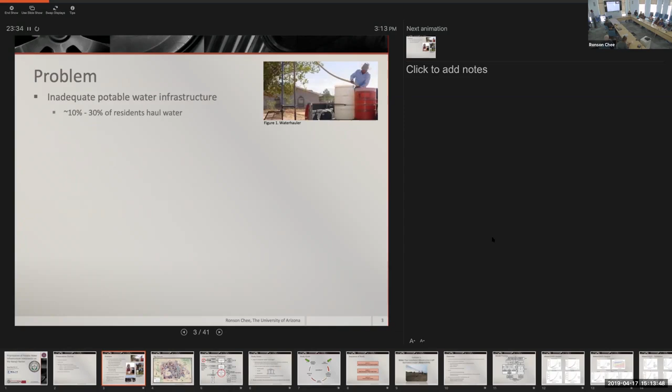Another issue is it causes a lot of health problems, not having access to clean water in your home, sanitation issues. And another issue on Navajo is we have a lot of abandoned uranium mines that contaminate the water. But people actually still use those water sources because there's no other option. Some elders will actually use contaminated water for drinking and for their livestock, and they get a lot of cancer. We have a high cancer rate related to that.

It also hinders the development. We don't really have much economic development. You have small vendors selling different products, sort of like a flea market type setting. And there's really no big business, no industry, no commercial. So the jobs are really lacking. Part of that's tied to we don't have the infrastructure to even support that type of a city setting or sort of large businesses.

So it's kind of like the chicken and the egg. You can either have the infrastructure support the economy, or you can have the economy support the infrastructure. So it's all tied together.

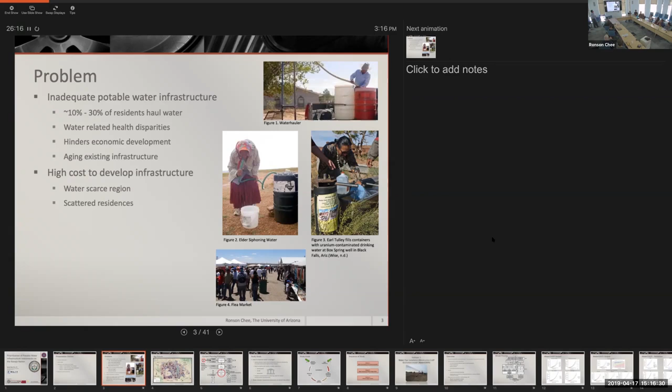And like I said, people are scattered all over. We have towns, but they're very small, not highly populated, and there's just a lack of money to fund the infrastructure.

The utility company is strained. Right now NTUA is the utility provider. About 90% of their customers are all residential, whereas here in Tucson you have maybe 30-40% business, commercial, industrial. When you have those big users connected to your system, they help offset the cost of operation and maintenance. When it's all residential, you can only charge so much per user. So you have this big gap between your operation and maintenance costs and your income, and this gap's only getting worse and worse. So the utility company has a lot of problems.

It's very difficult to design these water systems. There's a lot of uncertainties, and a lot of people are leaving the reservation to pursue other opportunities elsewhere. They'll come to Tucson, Phoenix, Albuquerque, just because there's jobs, there's school, there's opportunity. So we have issues like that.

So it's very hard to plan for how do we plan for the growth. We don't know where the people are gonna go. Then you have things like drought, which makes things even harder to plan for. And then you have this economic issue. There's other barriers besides just water, you know, poverty's big. There's a lot of other socio-economic factors at play.

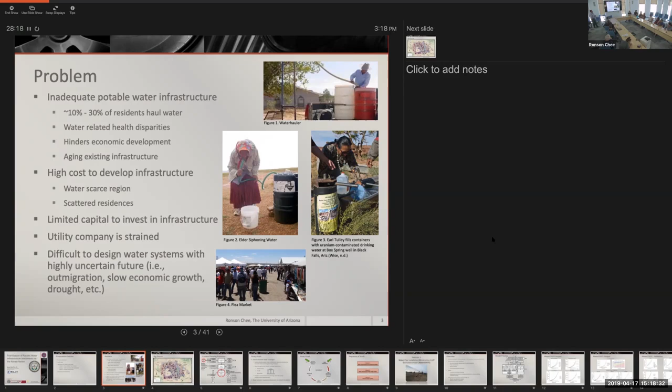So there's a lot of issues. I chose to focus - I'm a civil engineer - I chose to focus on the infrastructure piece, but there's tons of other aspects to look at. There's health issues, there's schools, there's healthcare, there's all types of issues. But my approach was, how do we solve this from the engineering side?

So overall, the big picture is we have here the Navajo Nation. Everything in the gray shaded is the reservation. Hopi's right in the middle. And all the dots you see are homes that don't have running water. And the blue is the existing water lines that the utility company has.

And the red is planned or proposed pipelines to deliver water. You'll see a lot of them come off of the Colorado River to deliver water into Navajo. And the one from Shiprock to Gallup, that one's actually under construction. That's a large project.

It's like a $1 billion pipeline project. The other ones are in the works to be planned, or they don't have funding, but they're actually working on them. So if you add up all these proposed pipelines, you're probably looking at maybe $10 billion of just water pipelines that you're trying to build. Whereas the tribe only operates on about half a billion. So it's going to take years to figure this out.

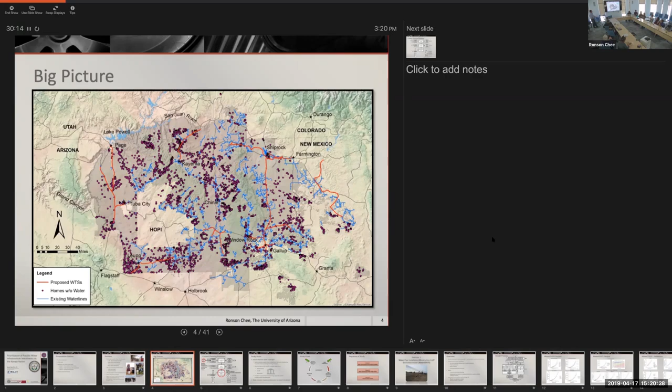So this is sort of how I pieced together how the current planning process is actually funded on Navajo. I put this together talking with all these different agencies - Water Resources, IHS, Bureau of Reclamation. And it's a very linear process. So you have certain people in at the planning and design phase, and then you have different agencies helping with construction.

And then once you get to the operation and maintenance, the utility company takes over. But the issue is that they don't have enough customers to offset the operation and maintenance costs. So there's a lot of people trying to help with the problem, but they're not looking at the back end and how do we pay for this infrastructure once we have it.

So it's like inheriting a big house and you can't pay the taxes, you can't pay the HOA fees, you can't pay the energy costs to run a big house. So that's the issue they're facing - they need some income to help fix some of this problem.

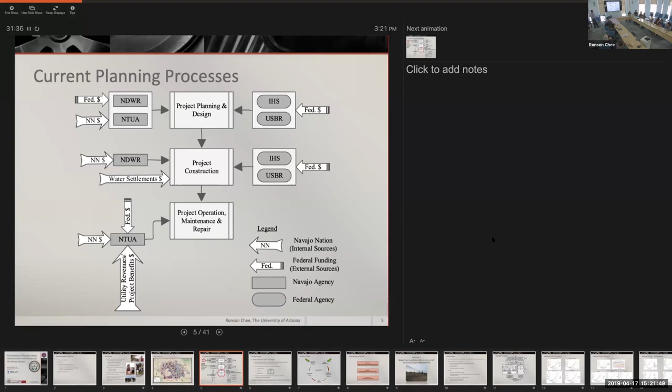And at the end, I'll show a revised planning strategy that we're actually trying to change. Another piece we're missing is the housing - like NHA, they're not involved. The economic development folks aren't involved. And we're missing this long-term planning and sustainability piece from the economics for it to work properly.

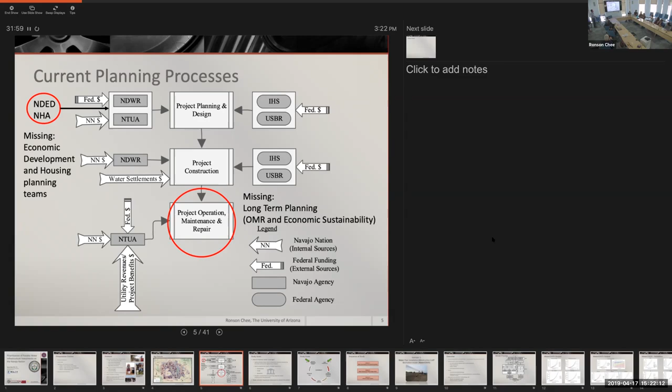So the goals - how do we improve the water coverage? We need to make smarter investments instead of just picking projects, instead of people in the chapter making a lot of noise and asking for a project. In my mind, that's not a good way to choose a project. So let's put some engineering into it.

We need to select projects that can meet multiple objectives. So Indian Health Service, they contribute about 30 million a year into water pipelines, but they only have a health focus. So if somebody wants to plan whatever it is, a business, IHS can't pay for that water capacity to accommodate the business. So they can only design for the home, and then that's it.

So we need to change the thinking and the vision to reflect what the whole needs are of the nation, rather than just taking a template that's been put for Navajo. So we want to try to satisfy environmental objectives, health, and economics. Those are the three, in my mind, the three things needed for sustainable type development.

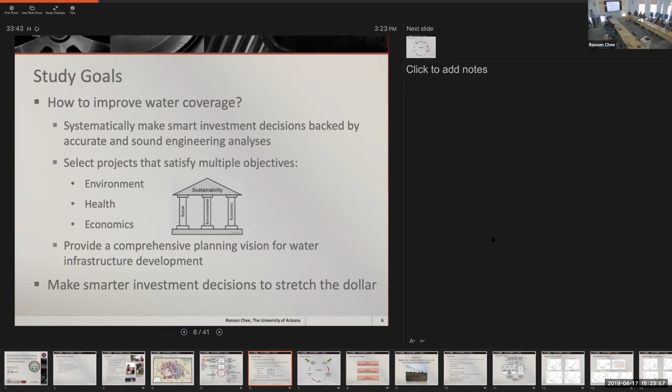And we want to be able to provide a vision for the nation in terms of a plan. Let's have a plan in tackling this problem. Let's not just pick projects here and there and see what happens. So we just got to be smarter in how we invest the money, the limited dollars that we do have. We got to be smarter in where that money goes.

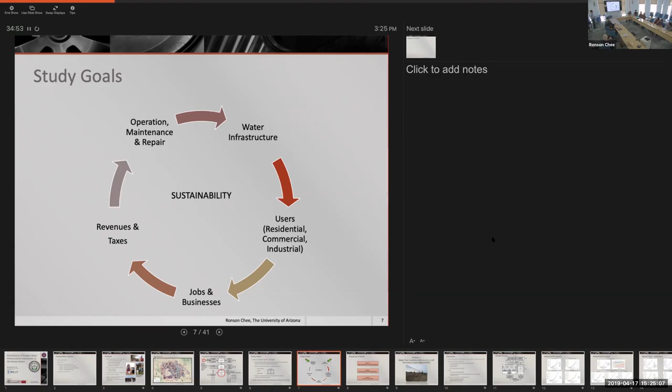So we developed three different sub-studies. One was a cost model for actually installing water pipe. The second one is actual design - a hydraulic model to do the design. And then that design feeds into a decision support system that evaluates different projects. So that's how it works.

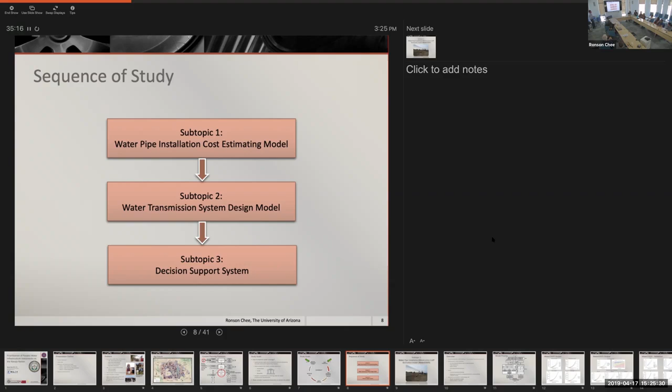So the first topic was this cost estimation model. And this is typically how you install water pipe in a field. I've actually done this before, so that's kind of how I was able to develop some of this model, some of the processes, seeing it actually being constructed.

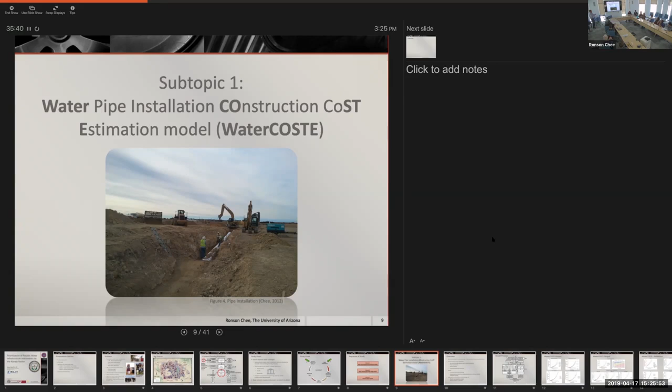Currently the way we estimate water pipelines is we just use cost data from other projects, other places. But when you're looking at some place like Navajo, it's different. Conditions are different. You have longer travel distances, and you have to order pipe from different locations. So when we're trying to apply other project data to Navajo, it doesn't really work. We need a better way to do it.

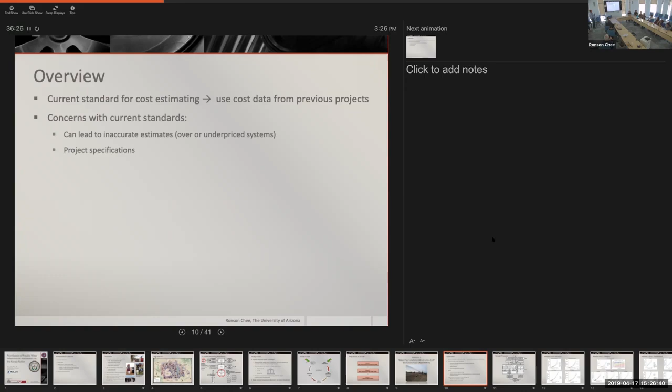If you overestimate or underestimate the pipe costs, you can have impacts in your planning and how much money you're trying to raise for a project. So it's very important, and right now there was really no accurate cost data out there.

So we just said we're going to build our own cost model. When you're evaluating different projects, you need a consistent methodology to evaluate them. If I use cost data for this project and a different cost model for this one, I can't compare them because they're not on the same basis. So the new estimation will allow you to do optimization type analyses and give consistent appraisals in your water projects.

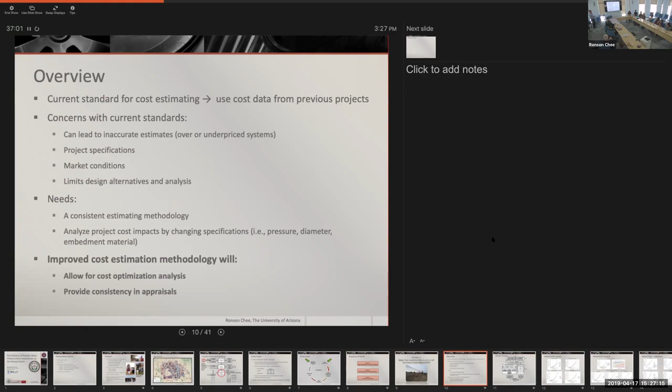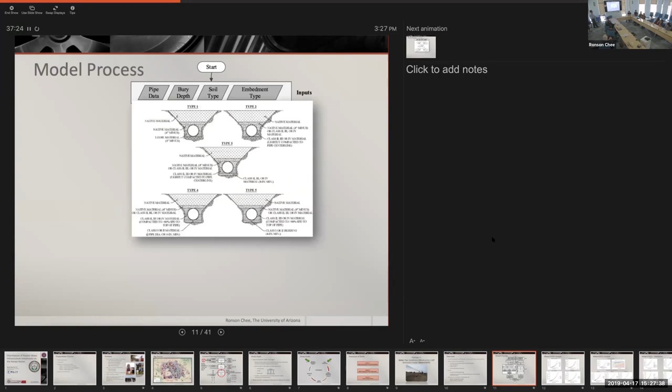So this is the process we basically tried to mimic and develop, similar to the picture. I'll go through this pretty quick, but it takes into account things like how deep you're going to place the pipe, the different slopes on the excavation, and then different embedment types around the pipe.

We're able to evaluate different materials, so we can do steel water pipe, PVC which is plastic, ductile iron pipe, and HDPE which is also plastic. So these are your 4 common water pipe types.

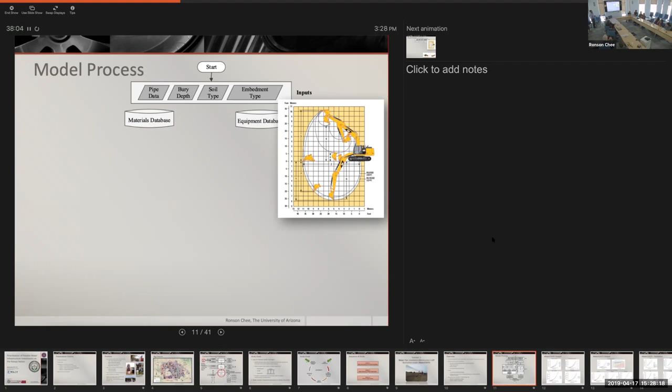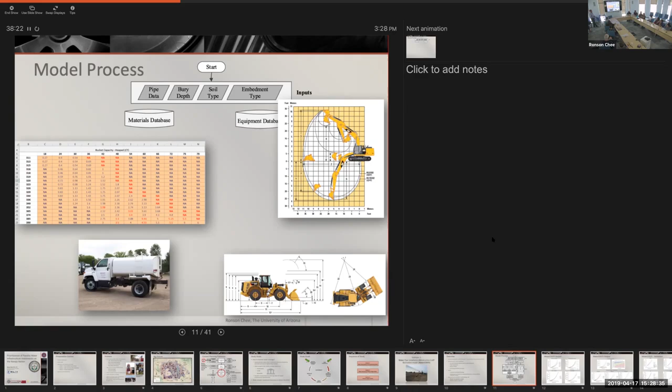We have essentially developed a whole cost table of different pipe types, different pressure ratings, different weights, different materials. On top of that, we also looked at what type of equipment is needed to install this water pipe. So we built in machine performance, how heavy of a pipe they can lift, how many water trucks you'll need. We looked at different cycle times and different capacities of different machines. So that's all built into the model.

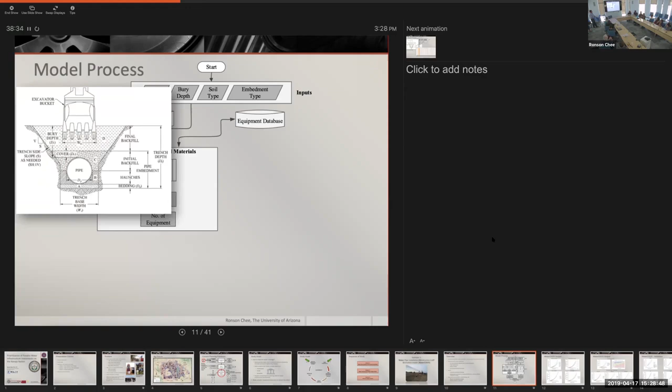And then we estimated labor and materials based on the size of pipe, how long it takes to install. So based on the pipe, we can estimate how many people are needed to do the work, and then how much time it actually takes. When you combine that all together, we can get a unit cost in dollars per foot for a certain diameter and a certain material.

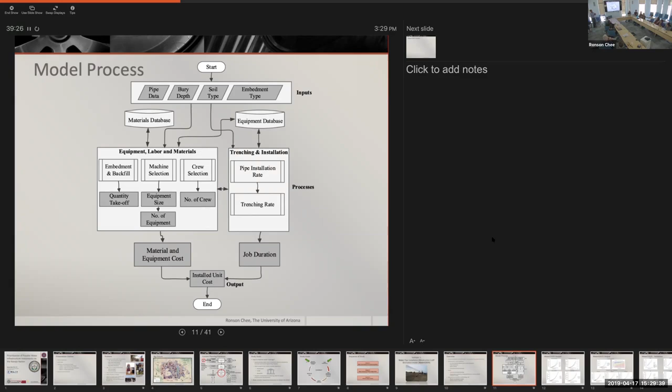So when you have that data, you can do a lot of different engineering analysis, different designs, different options, and you can really fine tune your costs. So you can lower the cost of your system at a very high level, instead of getting down into the detail you typically don't get until you're about to build a project. We built this tool so we could get more accurate data early in the design process and make better decisions.

So essentially the model we built will output results like this. We can change the pressure rating of the pipe, we can change the embedment material, we can change the depth and look at different soil types.

Then it gives us more detailed cost outputs in terms of how much is the labor, how much is materials, and it just gives us more insight into how we can save money for a lot of different projects, looking at different pressure classes and pressure ratings.

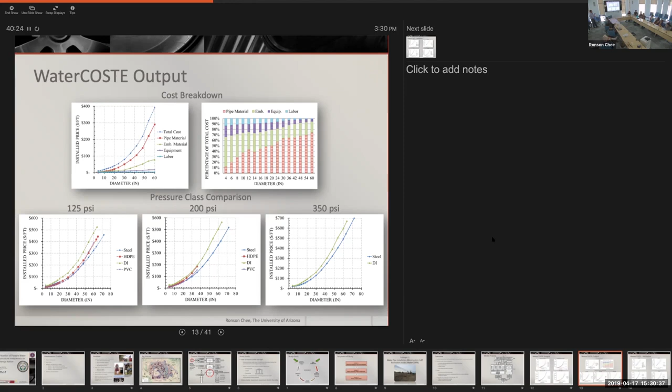So in Navajo, one of the issues is you're pumping a long distance, so you've got to pump over mountains, go down in a canyon, come back up. When you have a system like that, it gets very complex in terms of design. So knowing these costs of different pressure systems gives you a better idea of the design.

So we compared to other cost models, and we actually got really good results. We fell right around where other models were estimating.

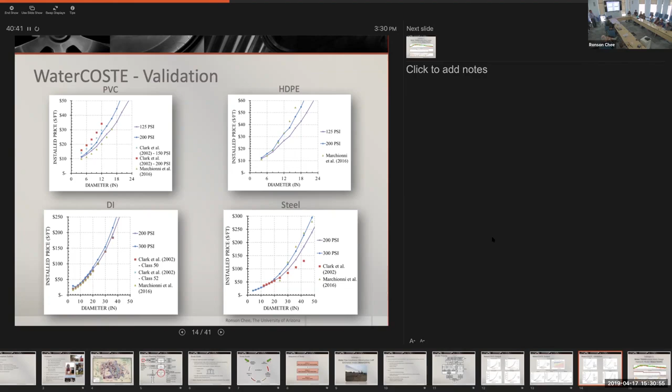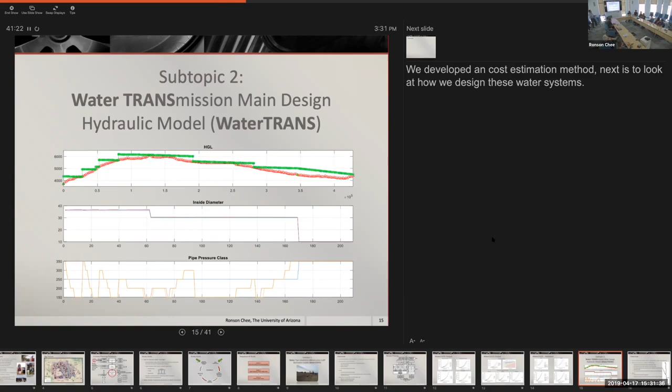So the next tool we developed was an actual hydraulic model to run the system hydraulics. If we design a pipeline, we need to know the pressures, we need to know where to install pump stations, where to install pressure reducing valves. If you're pumping over a mountain, it's very time consuming to do that process with conventional methods. So we developed our own hydraulic model that allows us to do this in maybe a quarter of the time it takes conventional methods to do it.

So the current methods, there are a few models that can do it. However, they have limitations, especially in locating pump stations.

So this is more of a civil engineer's type concept, but the blue dots are the pump stations. If you want to move a pump in the system, you have to do this whole process to actually move a pump. But we found a way to have the model find where to put the pump, eliminating different computation nodes, and we were able to speed up the design process by a lot.

So this is one project we actually implemented this on, from the map before. On the north end is Page, and on the southern end is Cameron, and the little spur off to the right is Tuba City. So we took that system and did some designs with this new model.

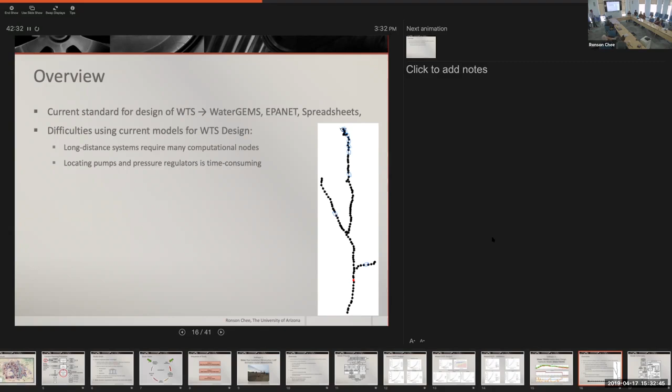With this new tool, we're able to really optimize what the design needed to be so we could save costs on the project.

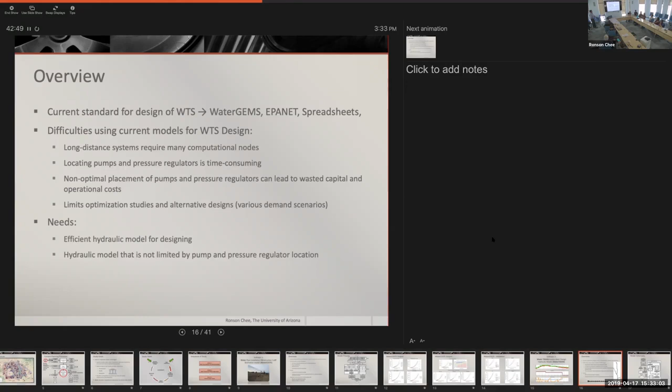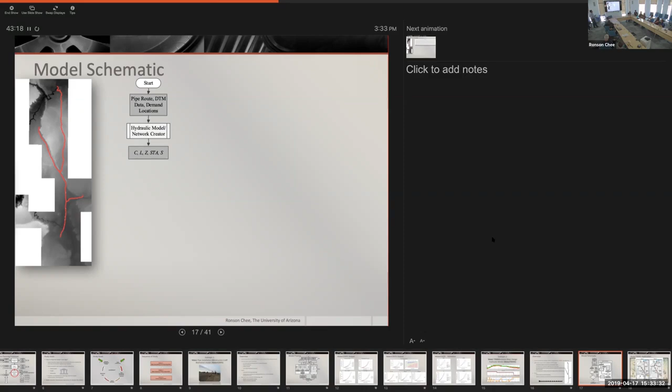So it's very important to consider the energy, how much energy is required to operate the system, and you want to try to minimize how much energy you're using because that all comes back to cost. It costs money to run electricity, run the pumps.

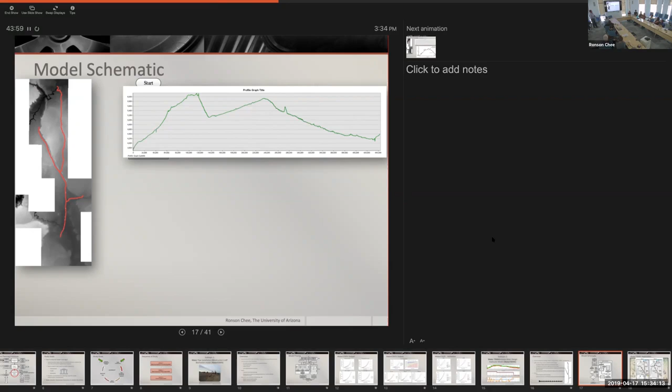These are all the equations and conservation of mass and energy laws that are built into it.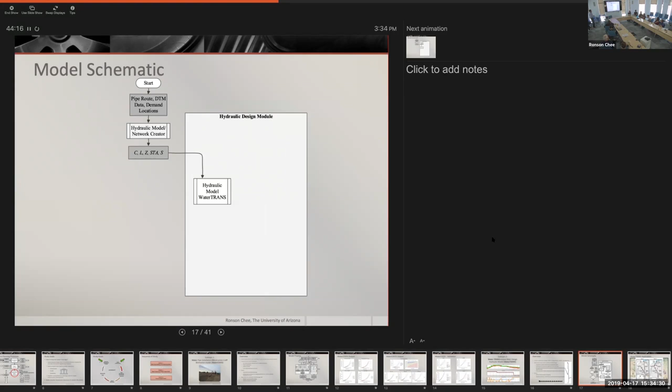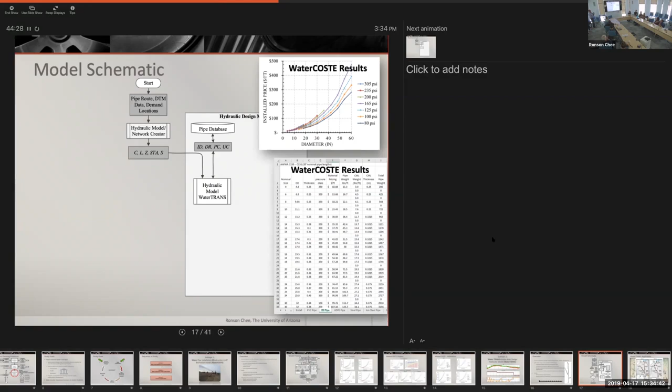We use the results from the previous model, which estimated costs, as input into this model. So now the hydraulic model can choose the most optimal cost material. It chooses it on its own.

We paired the hydraulic model with a genetic algorithm, which helped optimize where to locate these pumps.

Each one of these locations here is a pump station, and all the different lines are the hydraulic grade line. So it runs maybe thousands of simulations to try to find what the least cost design is of the full system.

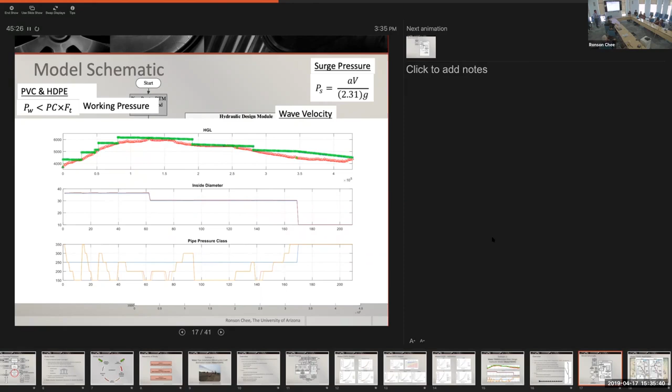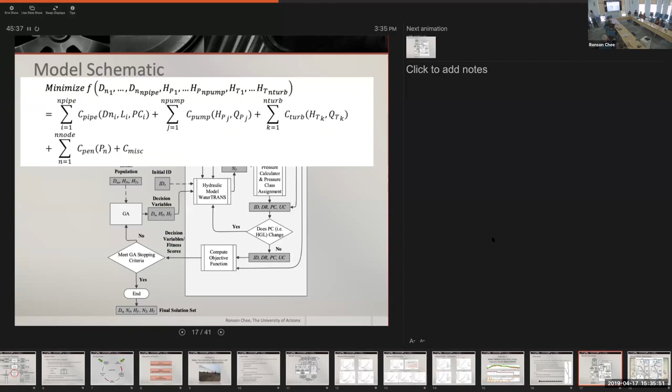And the cool thing about it too is with different pressure classes for different sections of pipe or different sections of the design, we can really optimize and get the cost down. A lot of models can't do that. So these are all the hydraulic processes in there.

So we took the model and ran it on this project. This actual alignment and design is from the Bureau of Reclamation. We took that and said, let's see if we can make a better system than what they have.

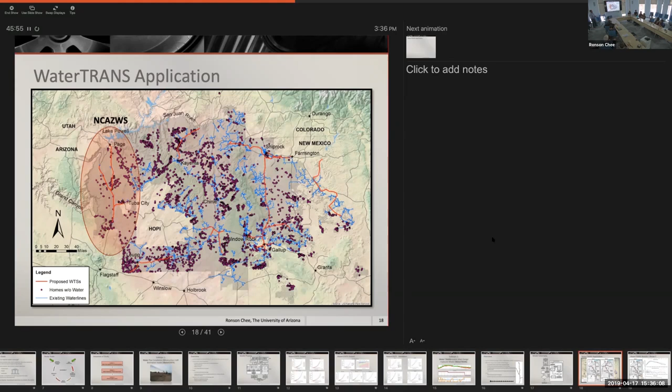We started to think outside the box. We were like, why are we running the pipeline along this portion of the reservation? There's really nothing out there, just a desert and a few little towns. But if you've ever driven along here, if you drive along this route, it's a lot more scenic, and you have a lot more opportunity for growth and development.

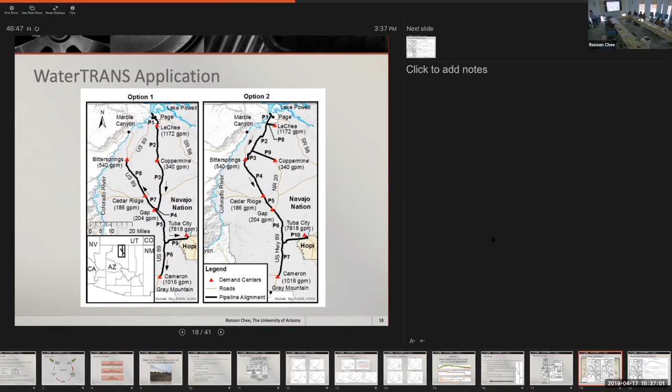So we came up with the alternative design and said, let's see if we can come up with a better design. This tool actually allows us to design this thing in a matter of a few days versus the weeks and months it took the Bureau of Rec to design this thing.

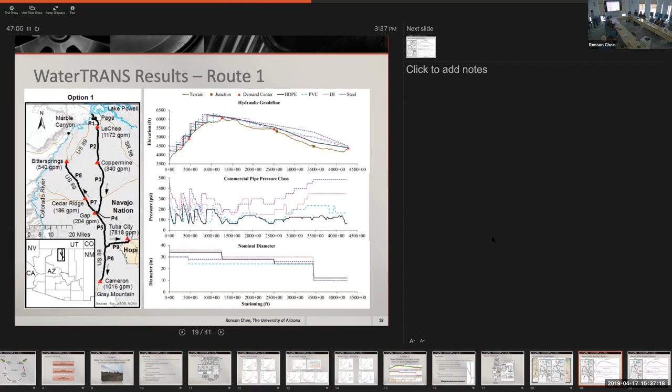So these are the different profiles. With this design, you're just pumping over one hill and then you let gravity carry the rest of the way down. And these are the model results, different pressures, different diameters of pipes.

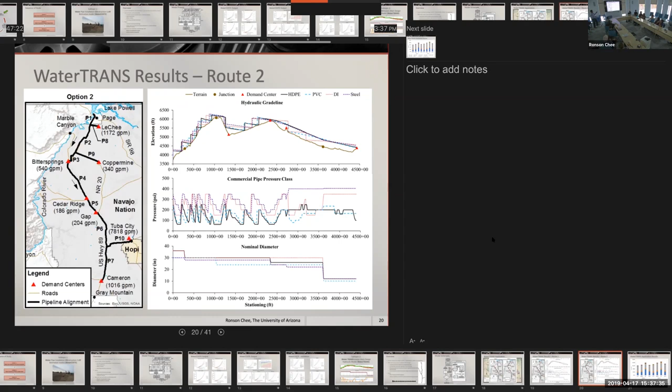And then here's the other option, which was to pump over two hills, so there's a little bit more energy cost in it. And this is the other design.

So with the tools that we develop, we can come up with different costs, and we can break out what's the construction cost, what's the operation, how much of it is the pump, how much of it is the turbines, and this gives us a full breakdown of the whole system.

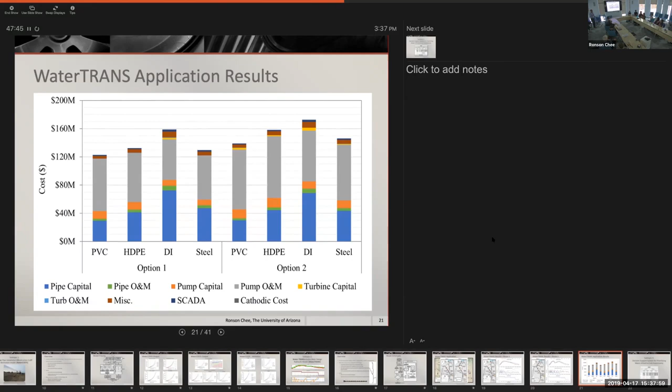So that tool, all these tools kind of build into each other. So the next phase is, okay, now we have a consistent way to evaluate different systems. Now let's pull it all together in one large model, and let's make a model choose which is the more economical, or which is the best option to choose. So this is a decision support model that we developed. This is the one that tribal council, water planners, the utility company, the Indian Health Service, they would actually be able to use, and the engineers would just kind of provide the input to it.

This is actually one thing we're working on now - we've been trying to convince council or some other people to actually adopt this methodology, because we think it's a lot better process than what's out there now.

So there's really no method to prioritize projects on Navajo. They kind of just pick and choose them. So you get people doing different things. These guys don't talk to these guys, so there's no global planning, there's no vision. And what happens is projects don't get built. This guy's doing one thing, this guy's doing another. You split the funding and then nothing happens because you don't have enough money to build it.

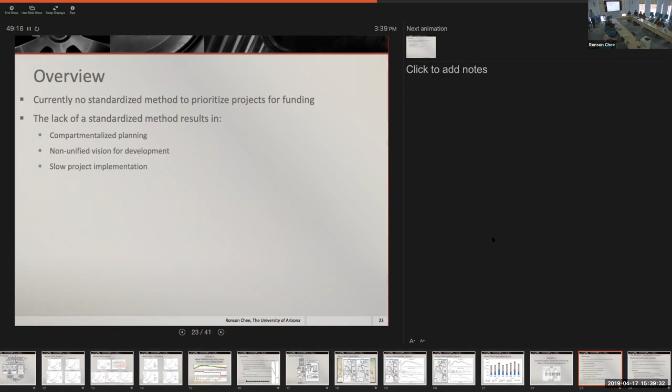So we need a standardized method. It's going to help us focus our resources, promote coordination, and it's also going to allow decision makers to be accountable to the voters, the people that they actually represent - where is this money being spent that we're allocating to these projects? With this model, it'll give the council members or whoever an opportunity to say, we're not choosing these out of nowhere, we have a systematic process that shows this is the highest ranking project, so this is why we're funding it. So it helps on their level as well.

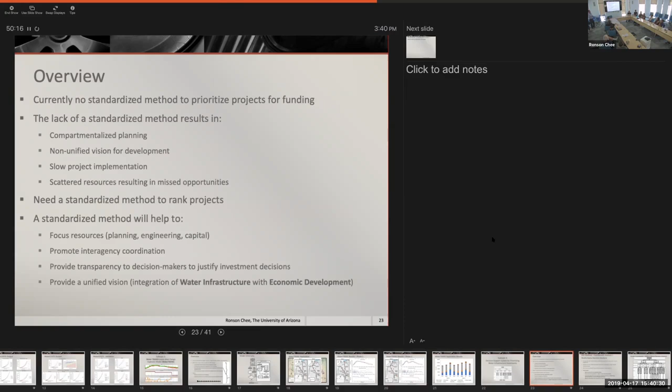And the big goal here is we need to package infrastructure with development, economic development. They go hand in hand. You can't talk about one without talking about the other.

So this is the method we chose, which is a cost-benefit analysis and a multi-criteria decision analysis. A lot of different fields use it: economics, energy, health fields, transportation. There's tons of studies out there, so we thought this would be the best one to apply. And the advantage of it is you don't have to have costs for everything - you can have one metric have cost, the other can be on a different numerical scale. That's one of the advantages.

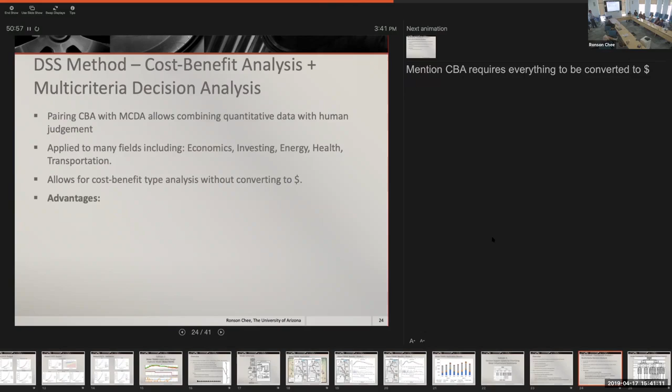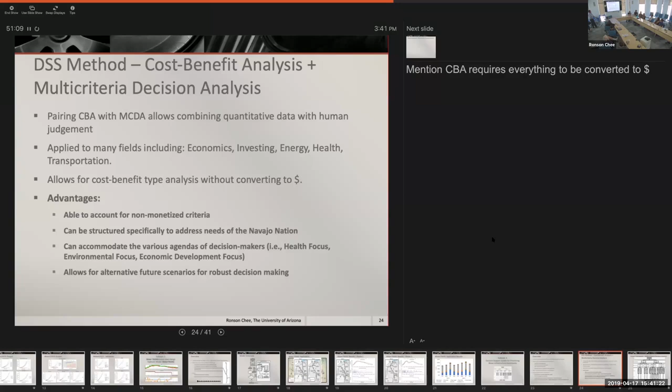And we can customize it to however we need. We can add criteria, remove criteria. And it gives you confidence in the decisions that you're making.

So this is how it's sort of laid out - the cost benefit hierarchy, and then you have different costs and benefits under each one. So the three we focus on were environmental, health, and economic impacts. And these are the different, we only applied it to the two projects, but these are the criteria we looked at.

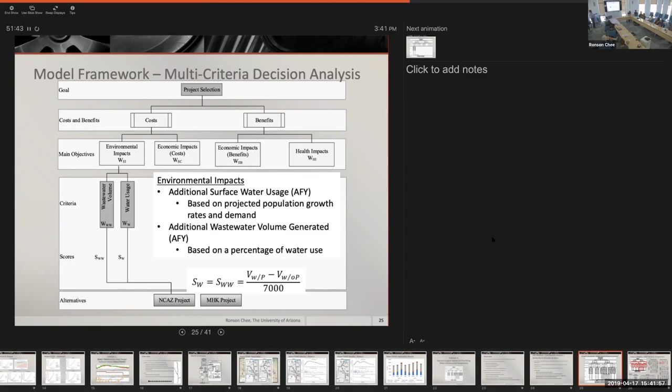Environmental impacts: how much water are we using? How much wastewater are we going to generate? What is the operation and maintenance costs?

And then economic impacts, we looked at how much benefit water haulers are going to see when they have a closer watering system, so they don't have to travel 30 miles just to get water. So in Leupp, where I'm from, they have a watering point, and people from Dilkon drive all the way from Dilkon to Leupp, which is like 50 miles just to get water, and they drive all the way back because it's faster and cheaper than trying to get it from somewhere else. So that's a big economic impact. Those people actually gain two hours a day instead of hauling water - they can do other things. So we tried to recognize that aspect.

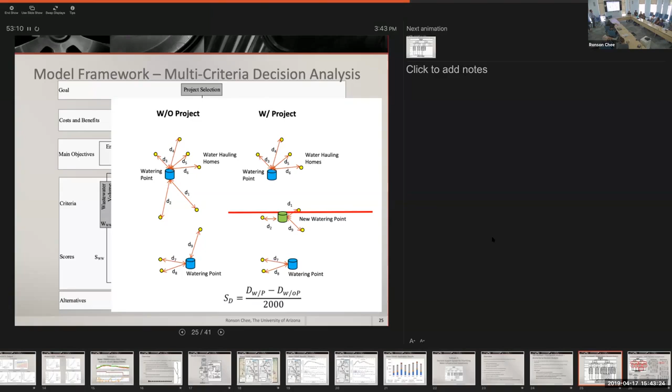And then we looked at economic development. We tried to pair what the planned development was in terms of tourism, how much traffic drives along the proposed project route, and how many jobs that might create.

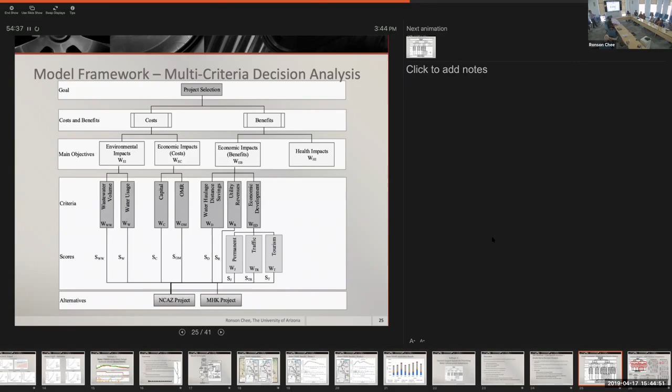And this is probably the toughest part of the whole project - we couldn't get any of the Navajo departments to have a vision of what was going to be built and where and when. So we kind of had to come up with that ourselves. And that's the hardest part of this whole thing, was just getting the involvement and getting Navajo to realize what's their vision - what are you guys planning? What are you guys planning to do? And they couldn't grasp it. So that was probably the hardest part, is there's really no leadership and planning to solve these problems. So if you guys are looking for any topics to study, economic development and helping them establish a vision for what needs to happen in terms of development, creating jobs - that vision's not there. So, a little side note.

And then we also looked at what are the health impacts. So homes that now have access to cleaner water, they get a score. And homes that used to use abandoned uranium sources now get a score because they're not using contaminated water anymore, so people having access to clean water.

So that's how we're ranking these different projects. These are the 2 projects we looked at, and all the dots are the houses with no water, and the big green dots are proposed projects we were able to identify that could be industrial centers or tourism centers, or they have a lot of scenic areas. So we added scores for those types of projects.

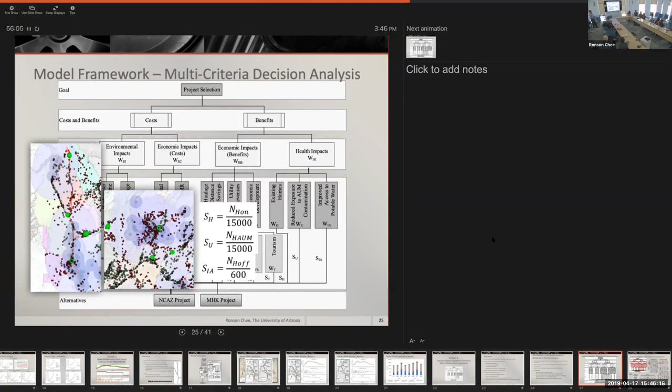And the circles, the purple circles, are distances to abandoned uranium mines. So if you're within the purple zone, you're more likely to be using contaminated water sources. The closer you are in a circle, the higher score you'd get on your health impacts. So that's how the whole score was calculated.

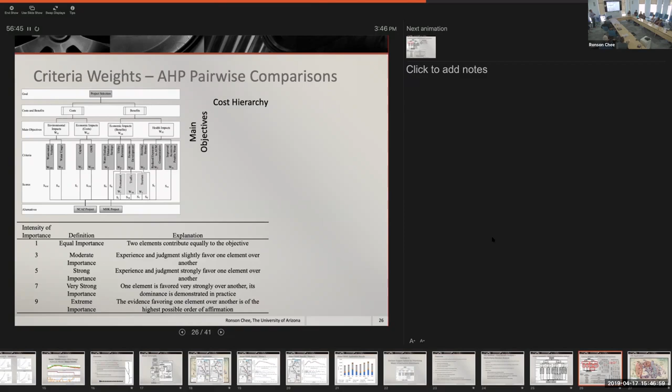And the important part is each of these criteria has a weight. Depending on your thinking, if you're more about protecting the environment, you'd rank the environmental category a lot higher. If you're more concerned with improving the economy through development and building, you'd score the economic impacts higher. If you're more worried about health concerns, you'd score health higher. But if you're equally weighted, you distribute the weighting equally and let the model decide what's important. So this process allows you to develop different weights for the different categories.

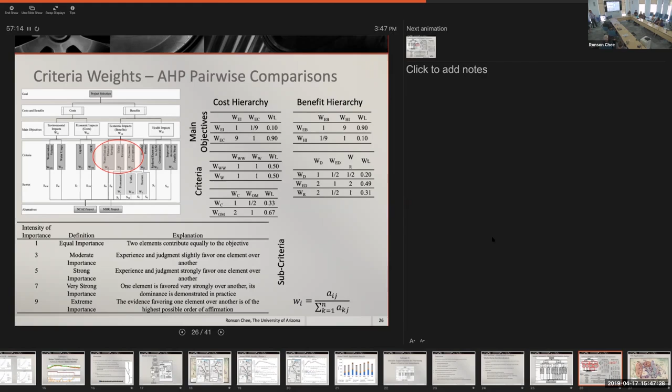And depending on your decision makers, they may have different agendas. One guy may be about health, another may be worried about the environment, another may say we need some business, we need to generate jobs. So what this model does is allow you to capture those different viewpoints and how you approach your development.

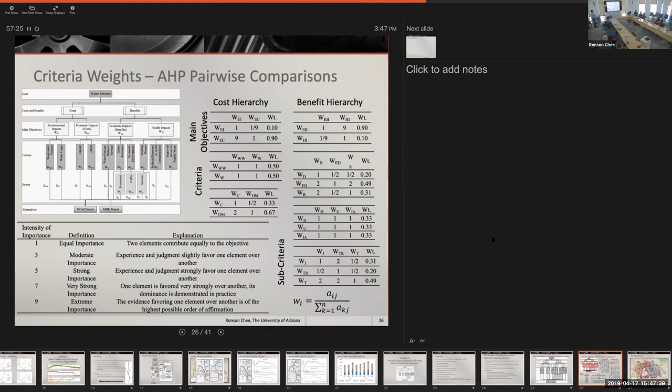So we created some different perspectives, kind of just pre-built inputs to the model, and we compare these two projects.

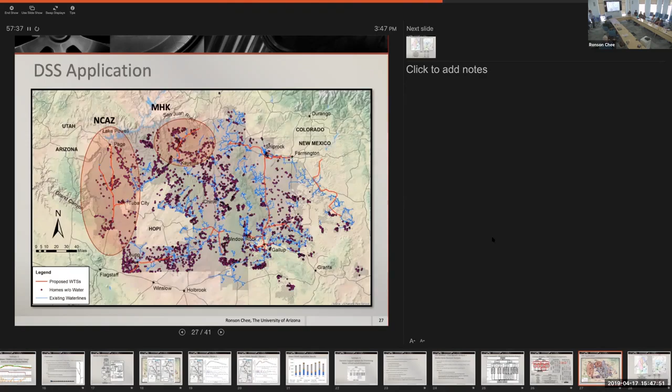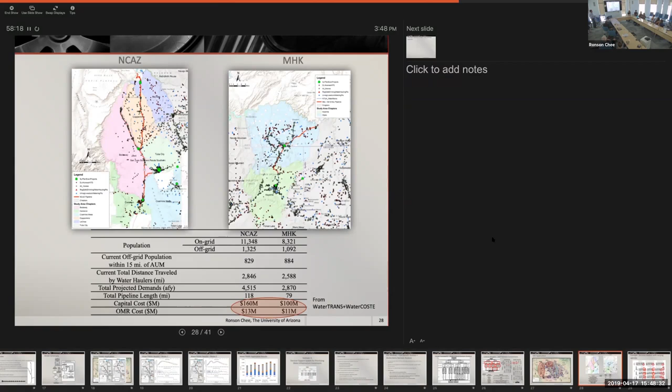So it's really hard to make a determination on which one to choose. That's what the model helps us sort through in this thinking process. So we created a health focus, economic development, and an environmental focus, just to mimic what different viewpoints in the room might be.

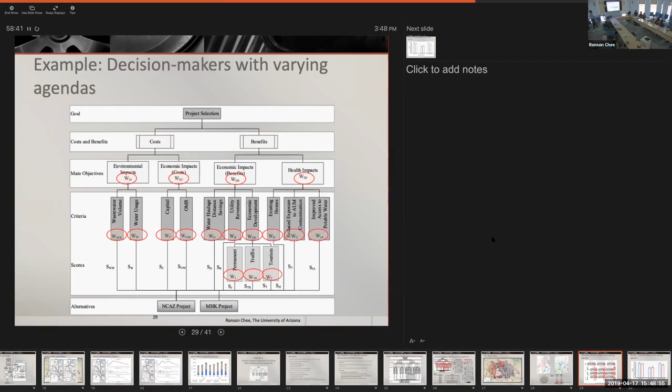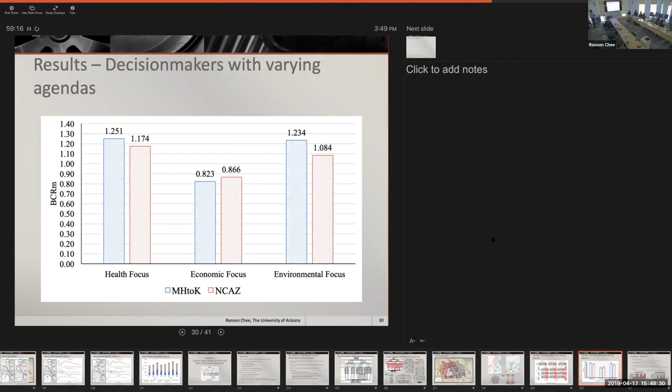Based on these weights, this is comparing the two projects. The higher the score, the model favors that particular project. So if we had a health focus, it chooses the Kayenta project. If it's economic focus, it chooses the Tuba City, North Central Arizona project. Environmental focus, it chooses the Kayenta project again. So depending on your perspective, it chooses which project is more feasible and more likely to fund, varying on how your thinking is. The model tries to capture that process.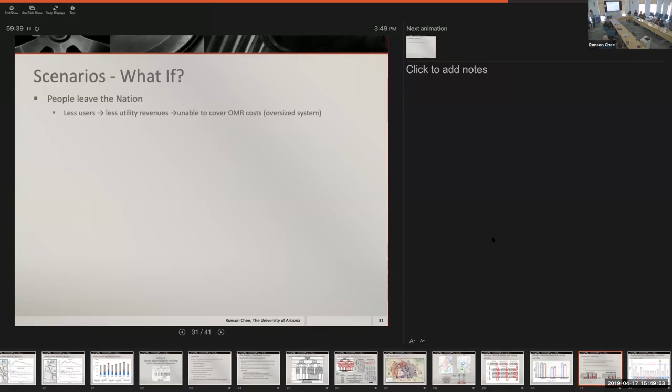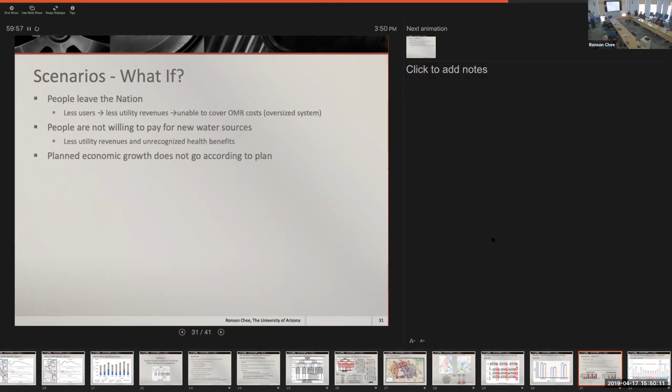What if we build a pipeline but people don't want to pay for the water service? That's another issue, people not willing to pay. What if we build a pipeline and the economic growth we hope for is not there? How does it affect our decision making? What if there's drought? How does that affect what we're planning, how does that change things?

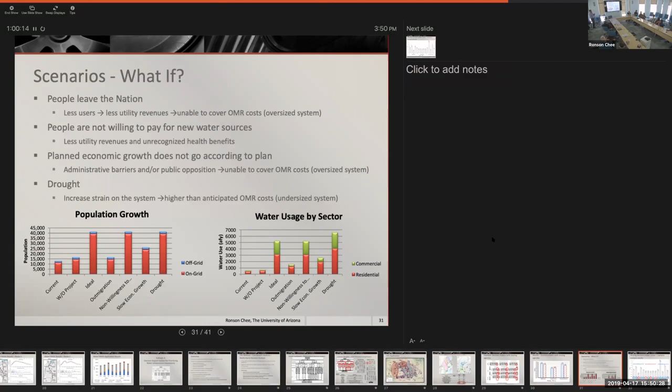So we created a growth model and a water usage model that actually helped us project what these conditions and scenarios might be. And here's sort of the overall results.

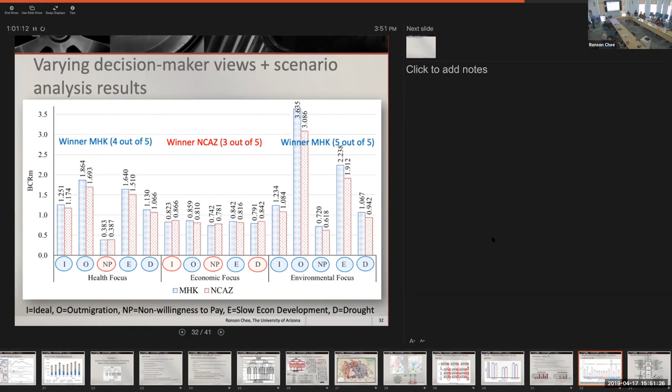So that's what the model can do. It helps you make a decision, considering different objectives and different scenarios that play out. It's like a tool to help you choose where to invest the money.

So you have a big pool of money, and now you let the model decide, and then you allocate resources to the various projects as they are in your ranking system. Hopefully this will allow the utility company to actually see some returns on their investment and help with the operation and maintenance costs, so we get back into that sustainable type cycle.

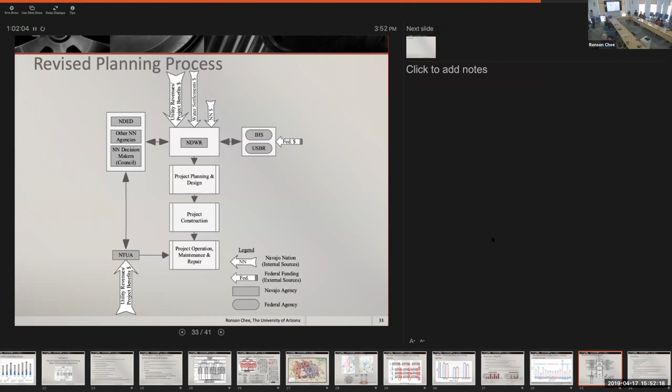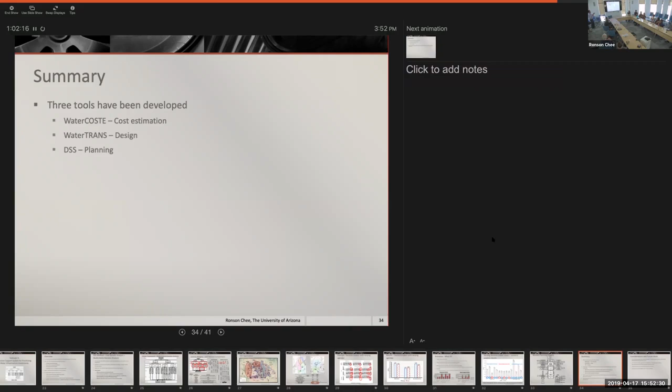So in summary, we created 3 tools. The one the tribes are more likely to use themselves would be the decision support tool. We tested 2 projects, but you saw on that map there are like 8 different projects, so if you wanted to extend this, you could evaluate all those other projects.

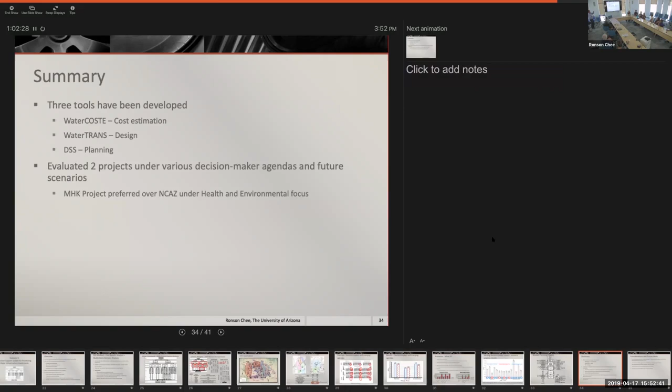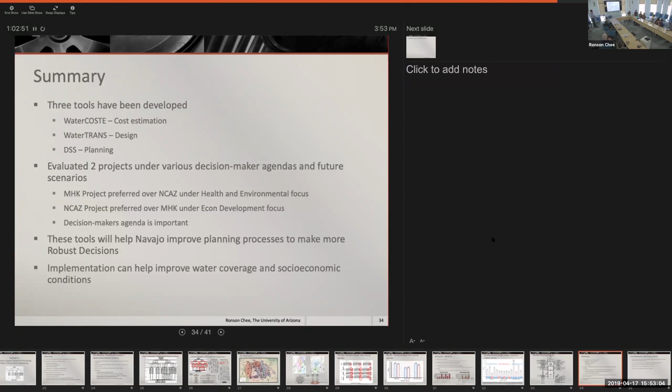The goal is these tools will help Navajo make some better, more robust decisions. Hopefully this type of process will improve some of the poverty and socioeconomic conditions on Navajo. So that's the overall goal.

If you guys are looking for study areas related to this, there's a lot of research needed on model inputs, like how many homes there are. We couldn't get an accurate idea on how many homes are on Navajo. It's crazy—the Indian Health Service couldn't give us a consistent answer. Every time we asked them, they gave us a different number. So the data isn't there to really refine this.

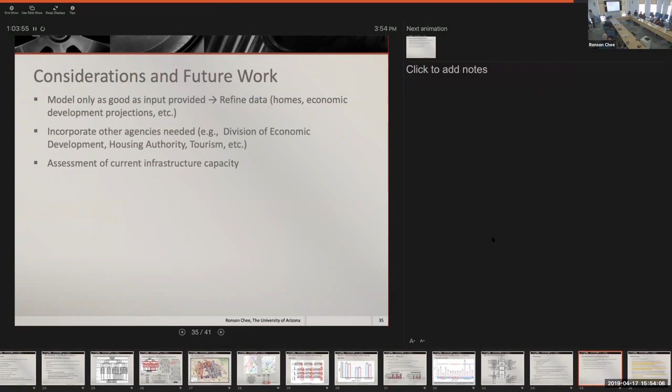The economic piece is vital—there's no vision for Navajo to paint out what needs to be built and what they're actually trying to do. Other planning departments need to be incorporated, and the existing infrastructure capacity needs a lot of study. And we never got the council or decision makers to actually develop the weights, so that's another piece we're trying to work on now—let's actually get them to use it.

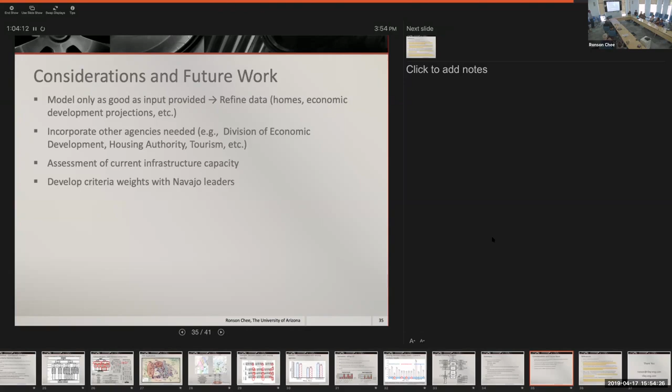So that's pretty much it, a summary of the research we did. Through the company now, we're actually trying to get this implemented on Navajo, and hopefully they can buy into some of the ideas and use some of the tools, so we can change the planning process and help improve Navajo. So that's pretty much it. If you guys have questions, I don't know how much time we have.

We can do about 5 or 6 minutes for questions. I just have 2 questions: the modeling, did you get it copyrighted under you or just under the company name? And second, which agencies in Navajo do you think are most progressive to implement certain projects?

We started to do the copyright for some of the software. We actually got a paper published for one of them. We submitted one but never finished publishing it. So now, through the company, we're trying to copyright some of this software, especially the cost tool and the engineering tools—that's on the engineering side. For the decision-making software, I don't think there's really any benefit to copyright it. That would be a tool for the nation to actually use.